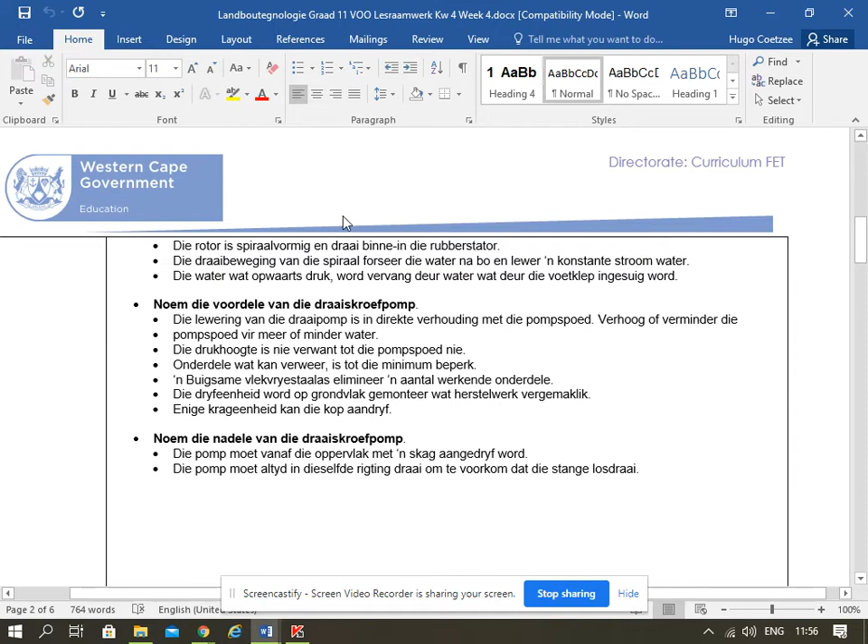Now we said this yesterday, this is our screw pump. It's also a lot more expensive. It's baie duurder. It's going to cost you more money to do this with a screw pump. But it is the better one because you can control, like we learned yesterday at Delheim, how much water do we need? We can't flood irrigate because it will flow away.

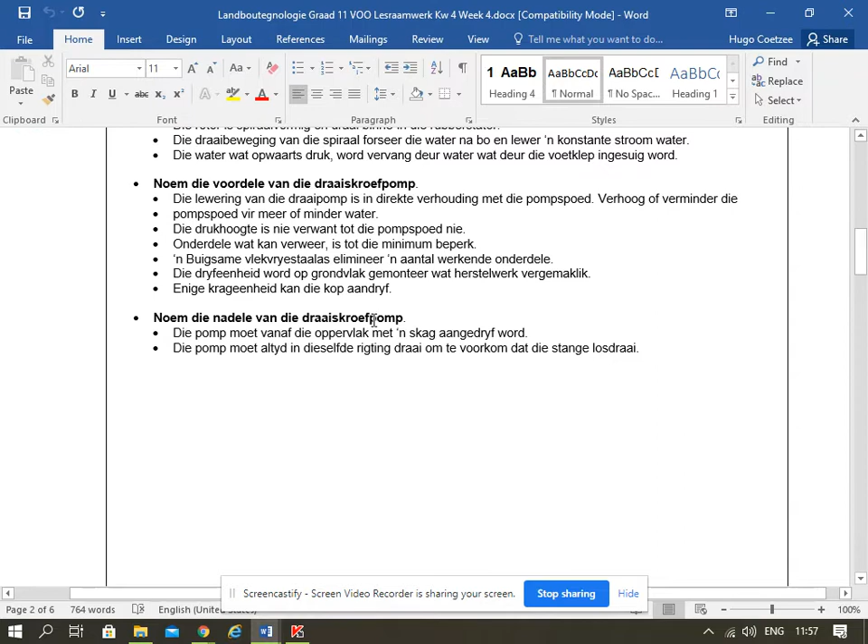Quality over quantity. Because in places like the Orange River, where they flood irrigate, they have huge amounts. The quantity is huge, as baie. But the quality is shit. That's papsak wyn. Hy sien verskil tussen wyn in 'n box en wyn in 'n sak. You understand? Wine in a bottle and wine across the road there in the oliekannetjie.

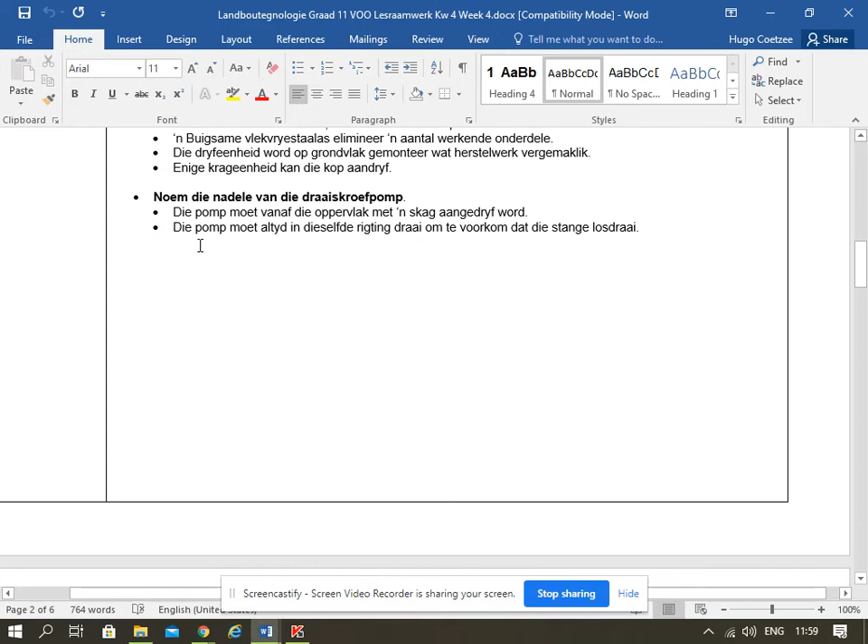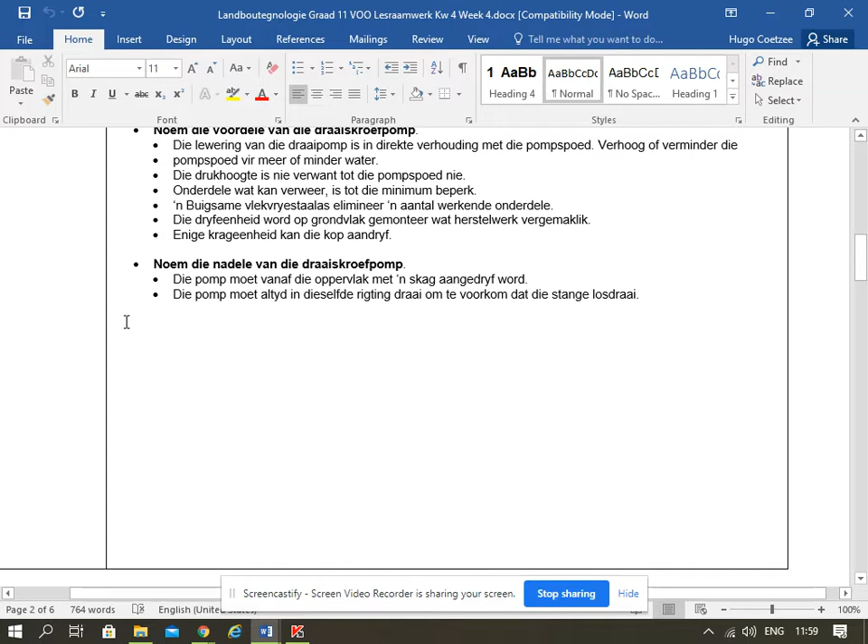And the next one, die nadele, all the negative sides. Die pomp moet vanaf die oppervlak met 'n skag aangedryf word, so there must be a shaft to run this pump. Die pomp moet altyd in dieselfde rigting draai om te voorkom dat die stange losdraai. You can't let the pump go clockwise then to anti-clockwise. Then it's going to rip out the whole shaft.

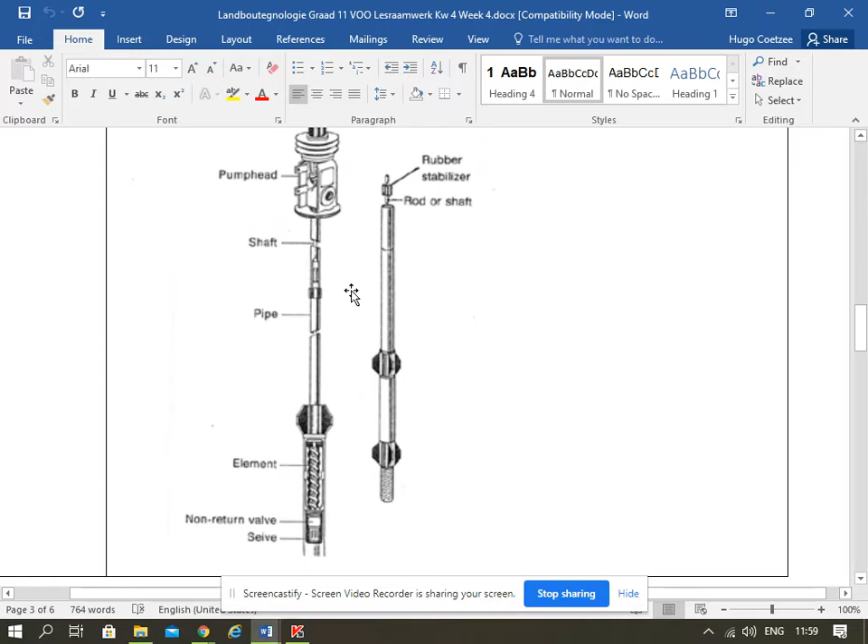And now we come to the national sport of Jan Kriel, centrifugal pump stealing. Die sentrifugale pomp.

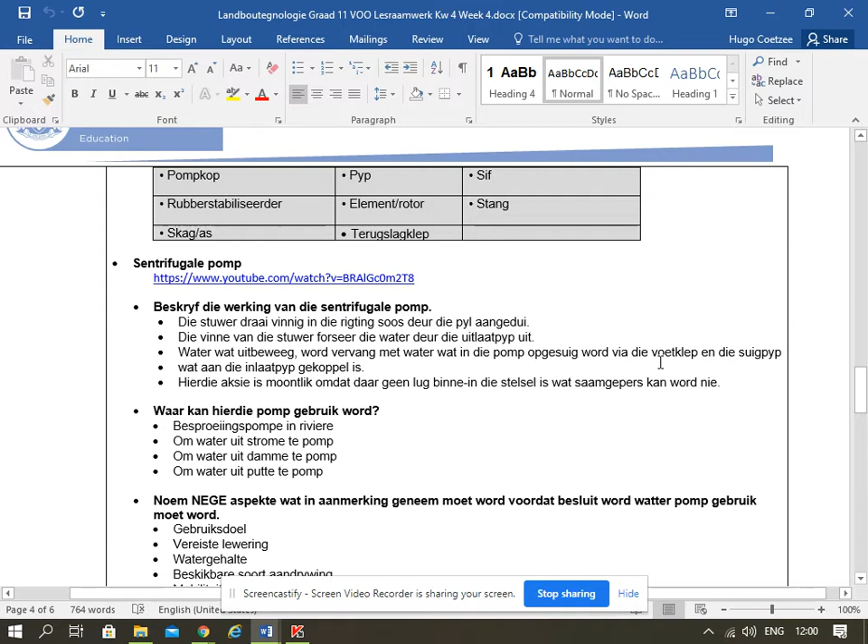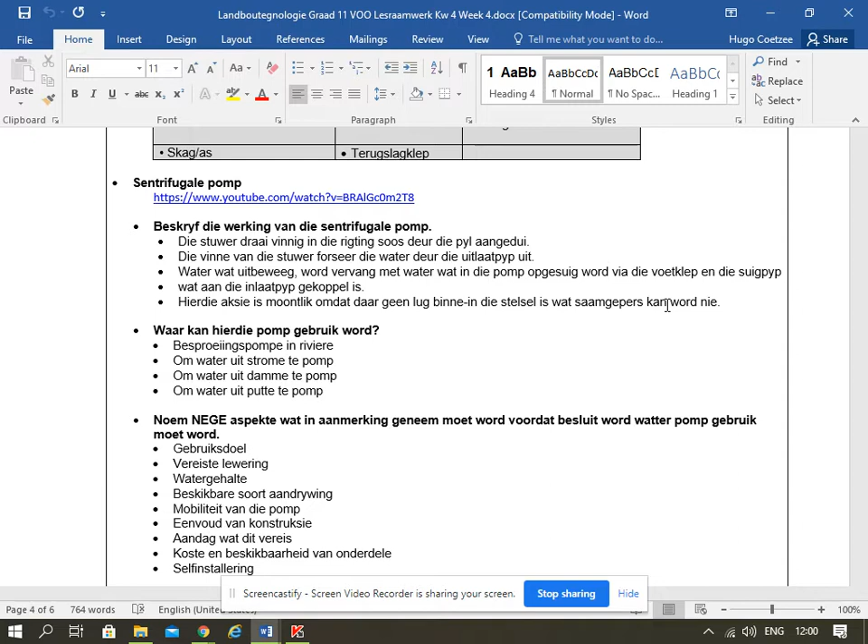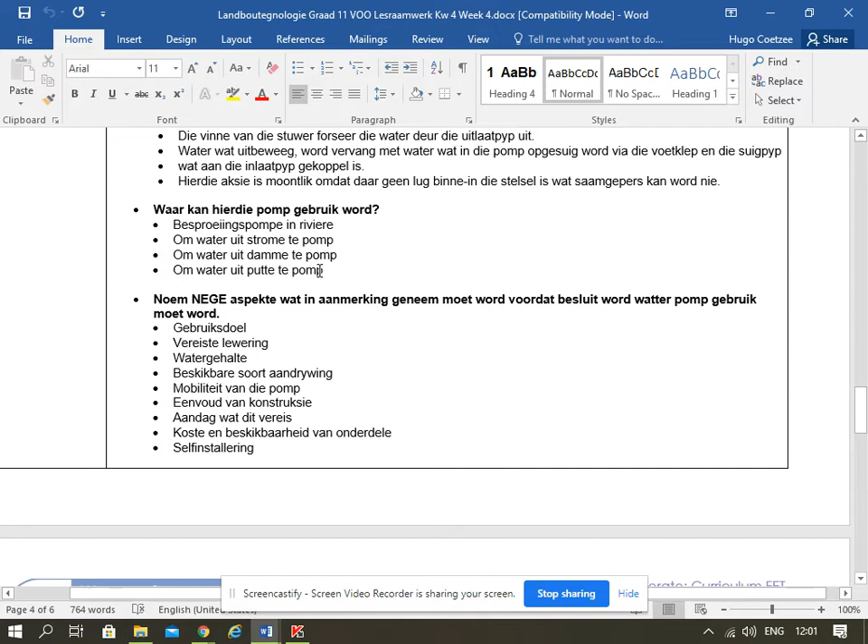Where do we use this? For river irrigation, vir water uit strome, water uit damme en water uit putte. So we use this to get water out of dams, out of streams, out of rivers and out of pits. Kan jy hom gebruik uit tenke uit? Yes.

Hey? Multi-purpose. Pools as well. Centrifugal pump kan vir 'n swembad gebruik. If it goes very, very bad in Cape Town, 'n lekker glasie pool water, my vriend.

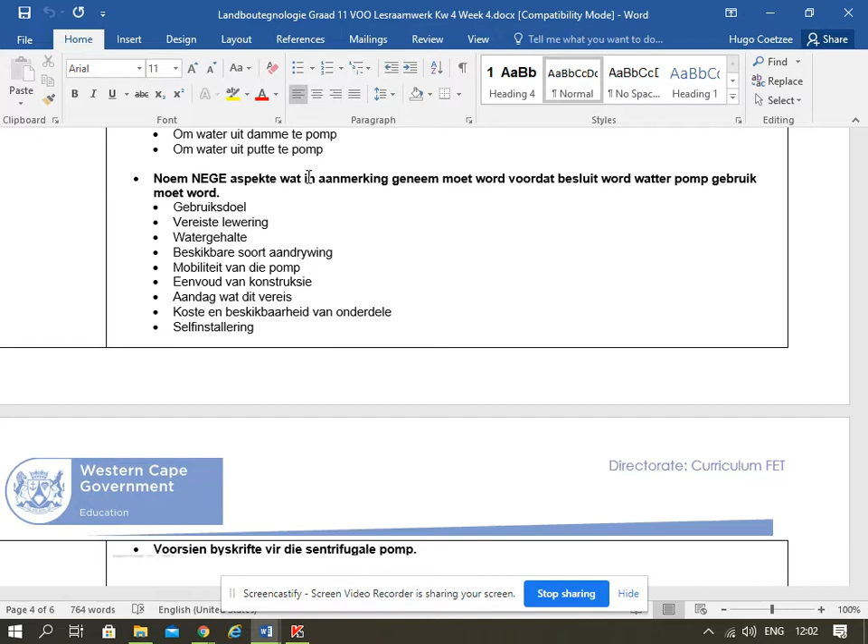Beskikbare soort aandrywing. How can I run my pump: with electricity, with a generator, with a bicycle? Jy moet eers uitfigure hoe gaan ek my pomp hardloop. Mobiliteit van die pomp. How mobile must the pump be? Moet ek hom kan uithaal en skuif of moet hy op 'n punt staan? Must it stay in its place or must I be able to move it? South Africa, try to move it.

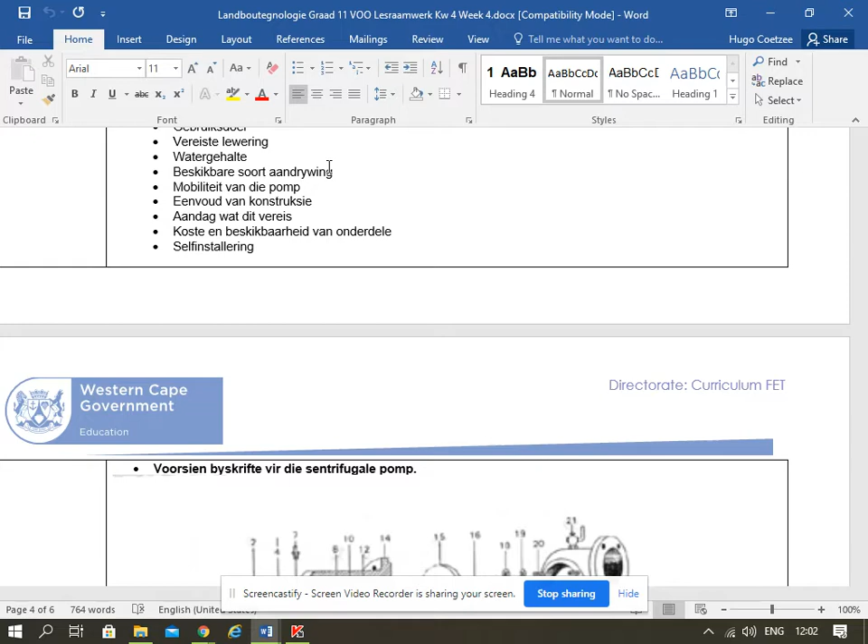Eenvoud van die konstruksie. How easy is it to build this and how is it constructed? But remember, you work with farm workers that are not really fully educated. If it's something easy, then you install it. As dit maklik is, installeer dit. Maklik regmaak. Aandag wat dit vereis. How much time and maintenance am I going to spend on this pump? Hoe lank gaan ek werk aan die pomp? Koste en beskikbaarheid van onderdele. Are the parts available in my area where I live?

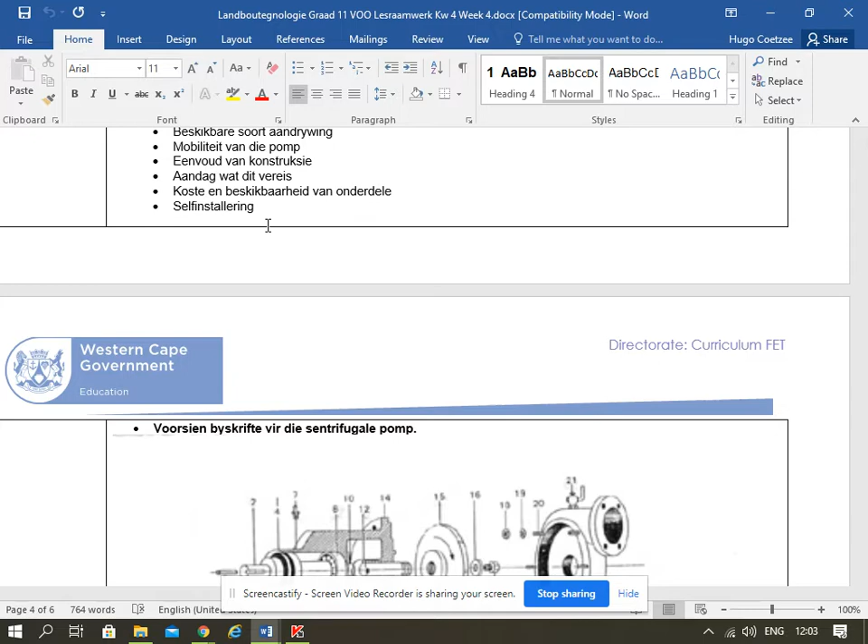Self-installering: can I put it in myself or should I get somebody in? Remember, we as farmers want to put it in ourselves. Julle het mos gesien, die John Deere saak wat aangaan. Die farmers baklei om hulle eie goed reg te maak. Ja, maar dan weet ons hoe dit werk. Pragtig. Want dis elektroniese rubbish wat krap op die goed.

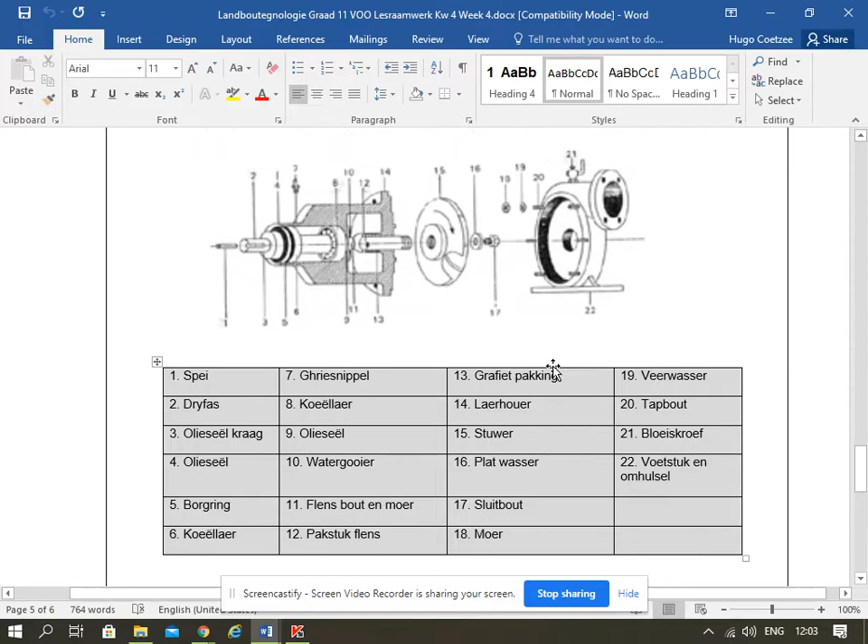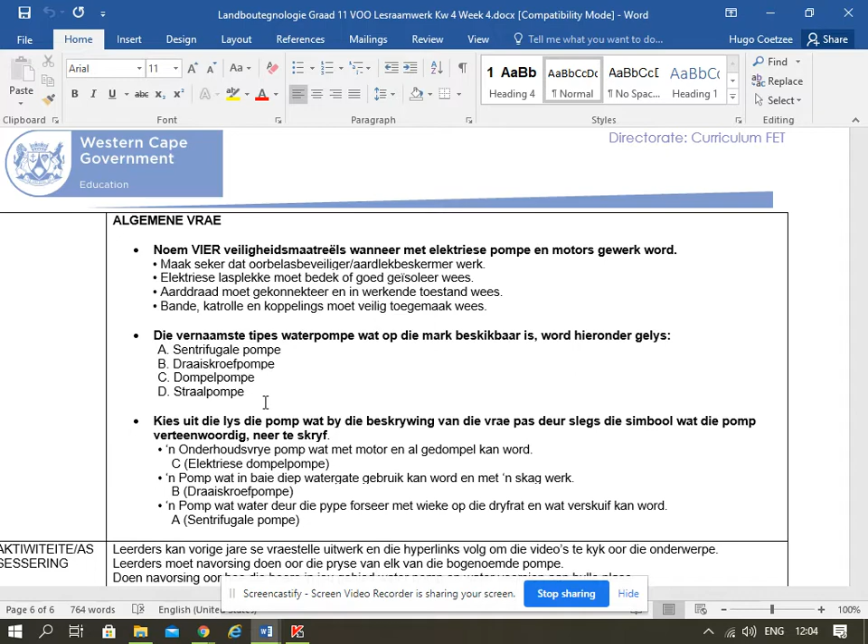There's the pump sketch with all our parts. Grease nipple. Right, and then standard general questions. Hierdie algemene vrae, you'll also have this in your book, are general questions that we can ask in the exam. Okay. Noem 4 veiligheidsmaatreëls wanneer ons met 'n pomp werk. Maak seker dat die oorbelasbeveiliger en aardlekbeskermer werk. Elektriese lasplekke. I'm not going to go through the whole thing, but there are questions that I can ask you in the exam at the end of the year. So now, to make it a bit more fun, because we've got all of these little sketches there.

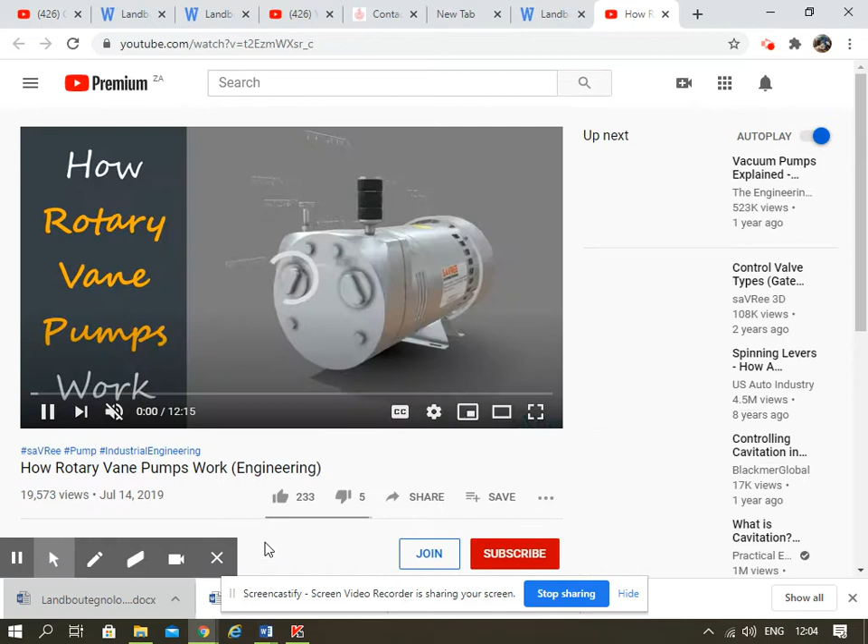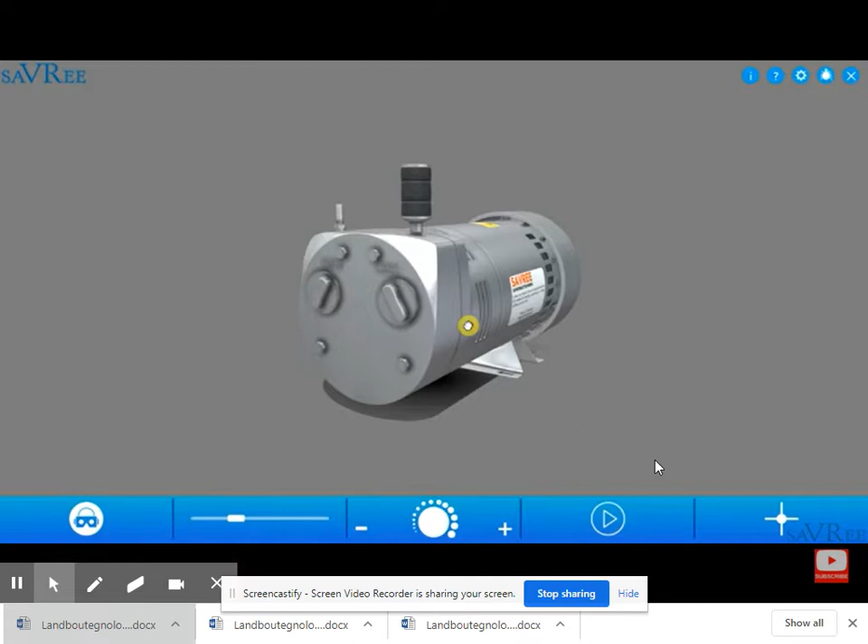All of its main components, how it works, some of its design features, and the advantages and disadvantages associated with this type of pump. So here is a rotary vane pump. This particular pump is quite small. It looks like it would connect to a 220 volt supply. It's used for aeration, so it's going to be pumping air, but we can also use vane pumps in hydraulic systems and also for creating a vacuum within a system. Let's load up the labels. We can have a look at some of the components.

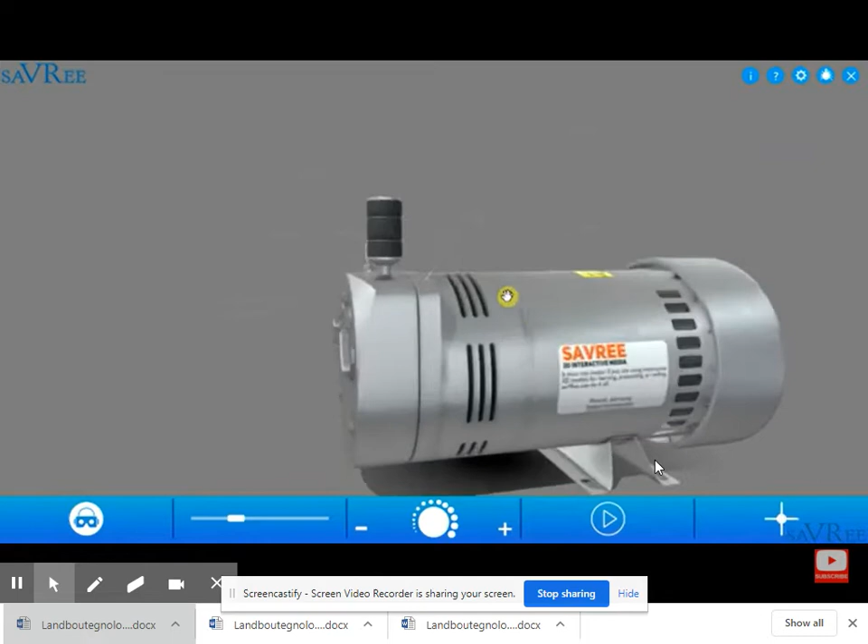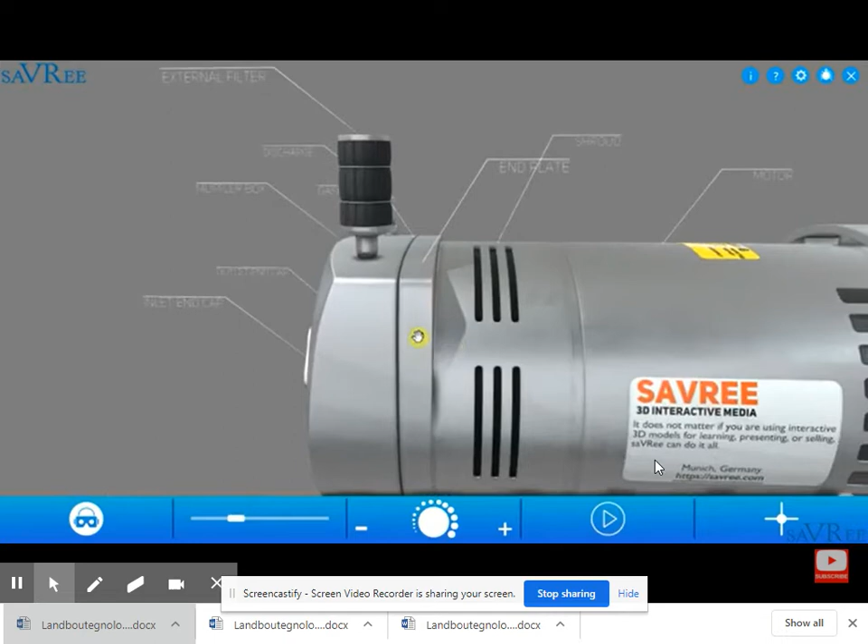So we have our motor. That is this section here. We have our shroud. We have an end plate, this item here. We've got an inlet and an outlet end cap. This is the inlet cap and the outlet in the background.

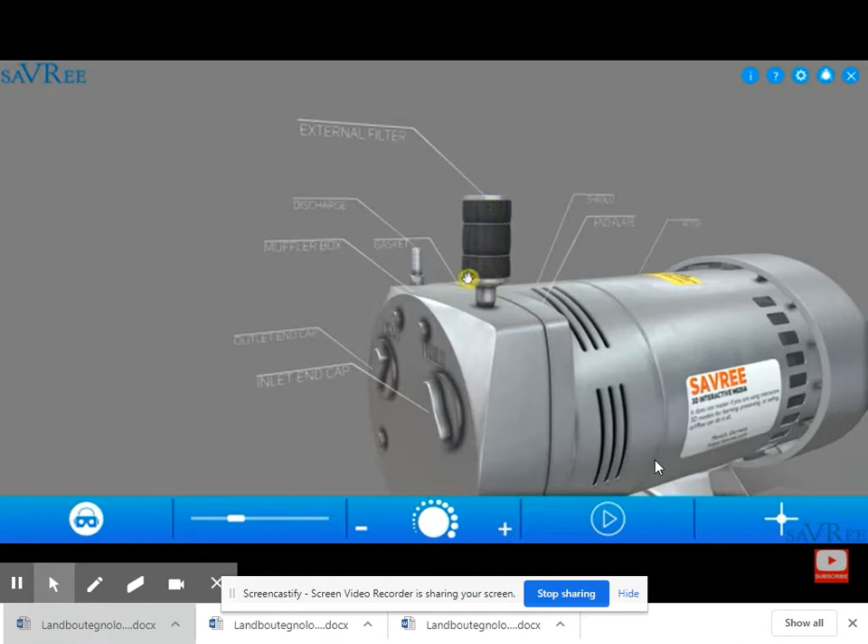We've got a muffler box. That is this whole piece around here. We've got an external filter which we use to draw air into the pump. And over the back, we've actually got the main discharge, and that would be through this pipe here. The gasket is a static type seal which has been installed between the muffler box and the end plate.

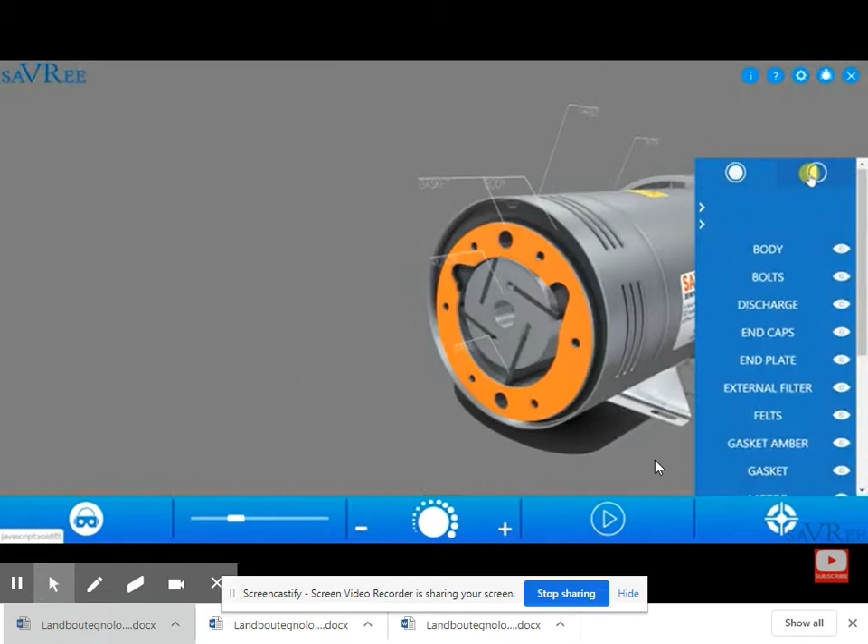If we take a cross section, then we can have a look at some of the internal components as well. So we can see some of the internal components. I'm just going to get rid of the amber gasket. We've got a rotor. That is this round item here.

We've got the vanes. There's 4 of them.

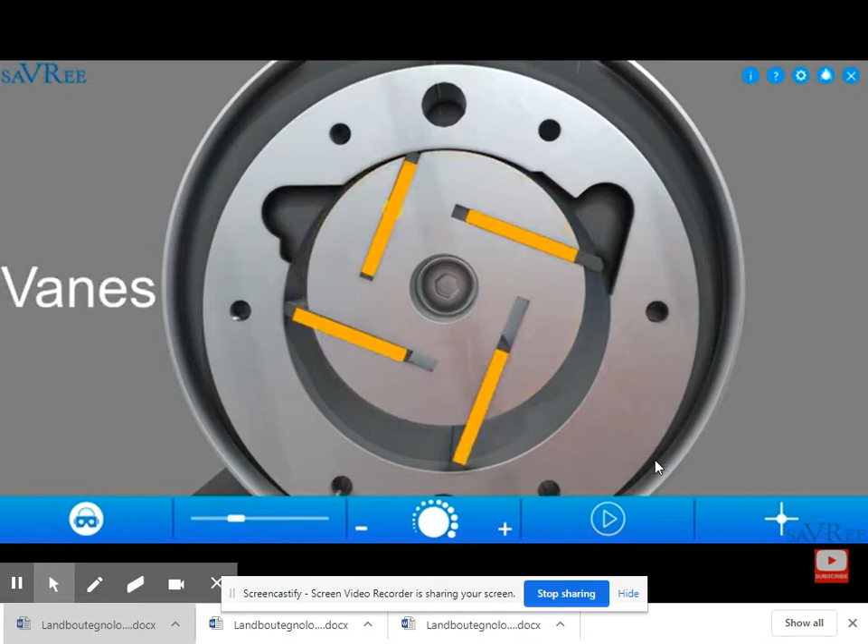One here, another one here, and one there. And then we have a cam ring, which some people also call a stator. And that is this entire piece around the outside here. The stator in this pump is stationary, whilst the rotor rotates.

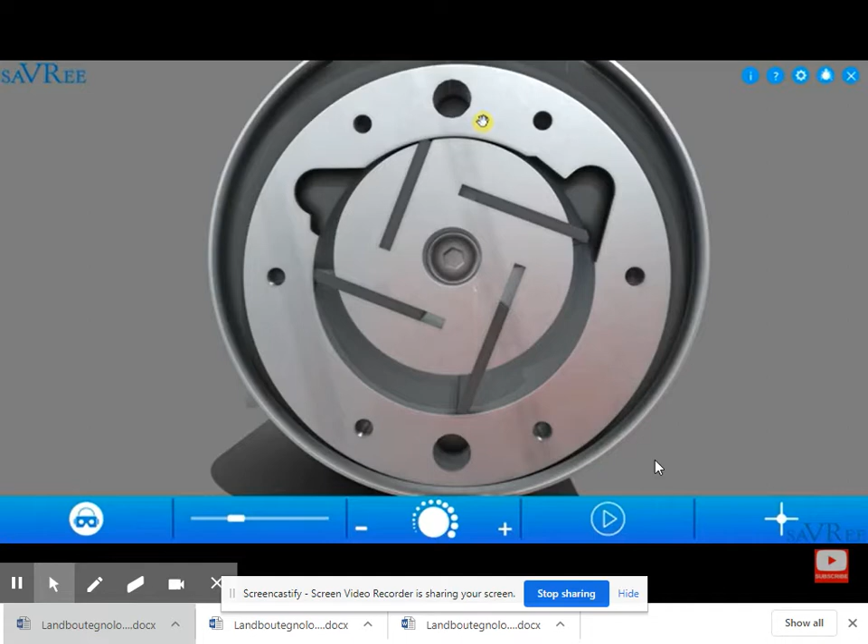Now we've learned the names of some of the components, let's see if we can figure out how it works. You can see we've got our external filter. That's where we're going to draw air into the pump. Because this type of pump is very sensitive to foreign particles and abrasion, we're actually going to have an additional filter inside the muffler box.

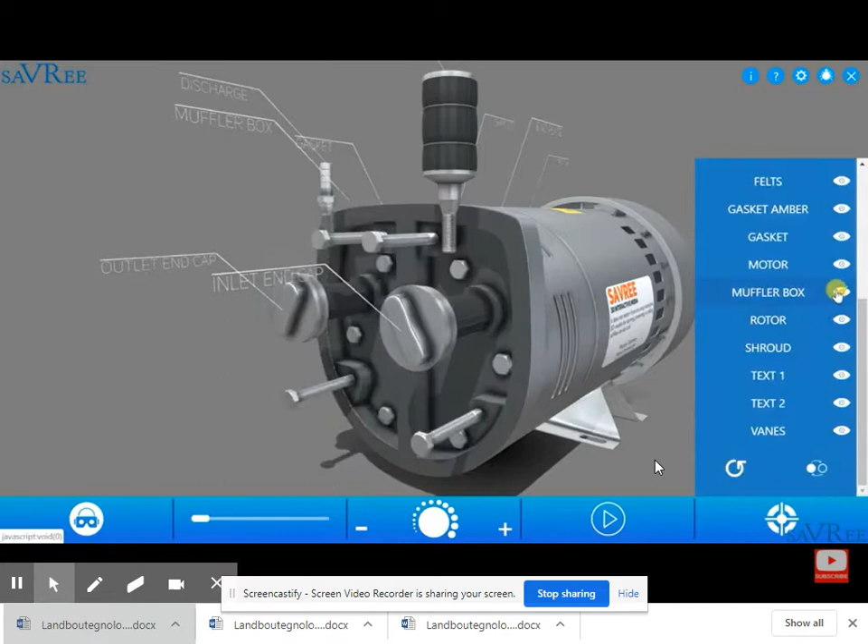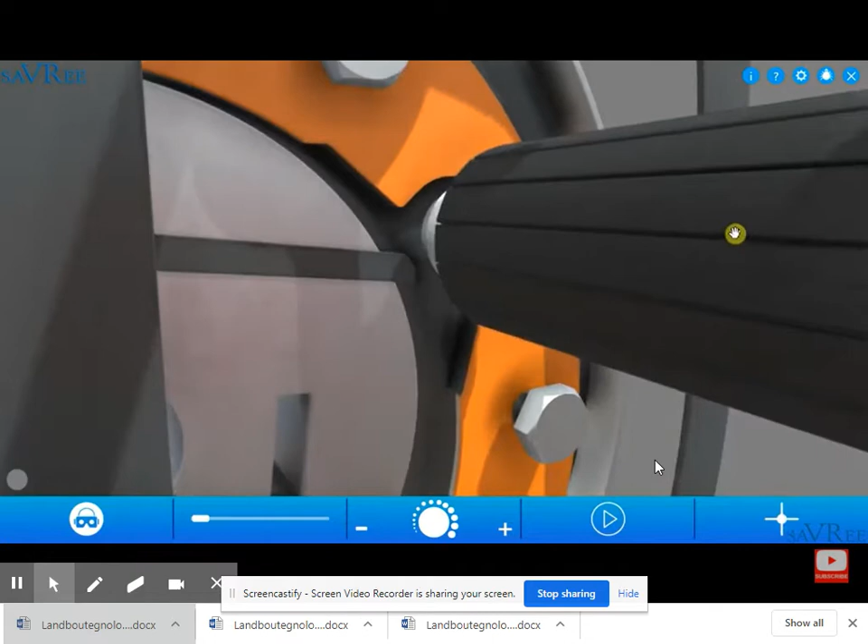We can see the air flows in through the filter here, is discharged through the base of the filter, and then passes through a secondary filter here in order to reach the suction port of the pump. We take away the end plate, we should be able to see the suction port underneath. So the air has passed through the external filter, now the internal filter, and it will be discharged in this space here, which is the suction port of the pump.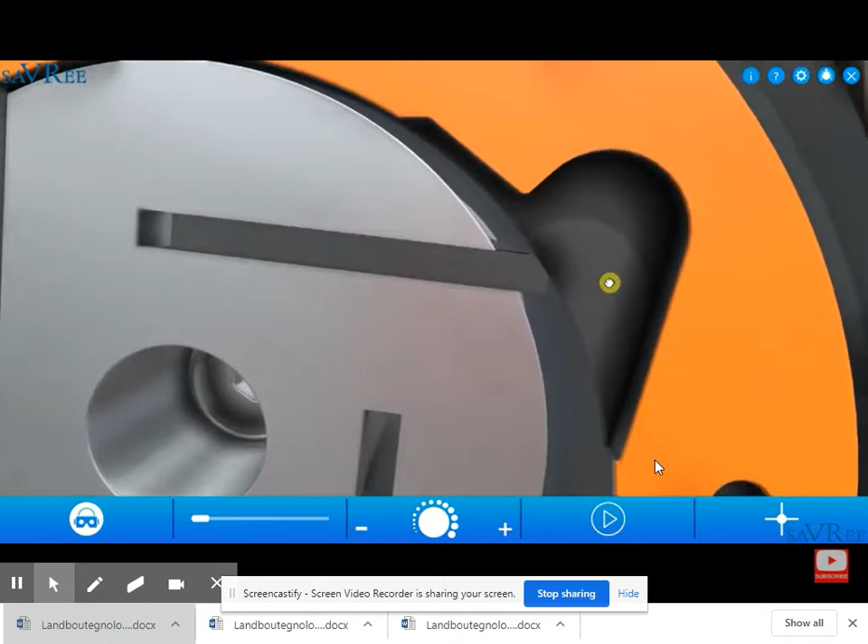If we take a cross section, we'll be able to get a much better view of what's happening inside the pump. And I think this time we can actually take away some of the labels, which we no longer need. When the air or fluid, in our example we're using air, but it can be another fluid. These pumps are often used for hydraulic fluids as well. If we back it up, we can watch what happens as the fluid flows in.

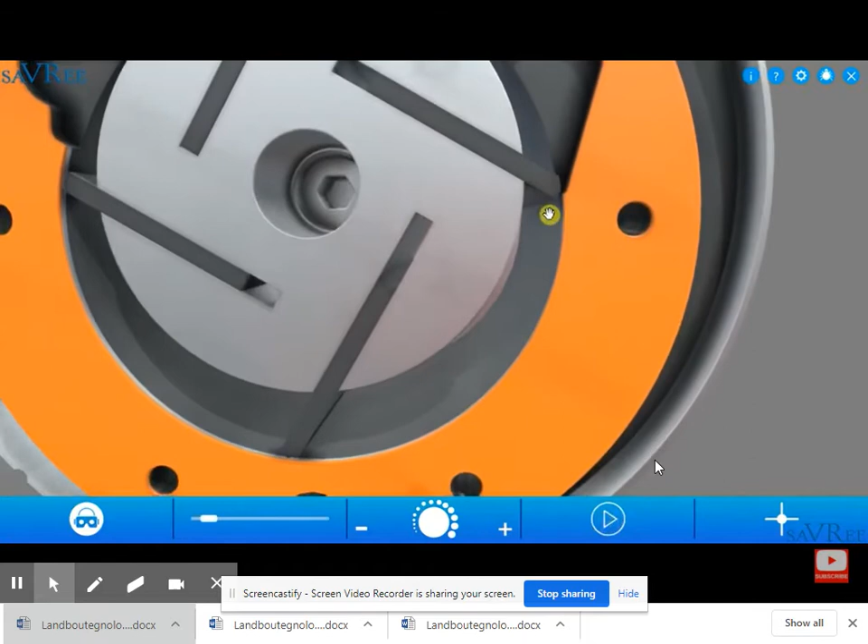The air comes in here, and it's going to fill up the entire space between one vane and the other vane. As the rotor rotates, we're going to seal off the space between the two vanes, and then as the rotor continues to rotate, the vanes are going to turn, and we're going to open up the discharge port.

Notice now that the discharge port is open, and we're going to displace or force out all of that fluid, all of that air into the discharge port. The reason this occurs is because gradually the volumetric space in this area is decreasing, whereas on the opposite side, on the suction side, the volumetric space was increasing.

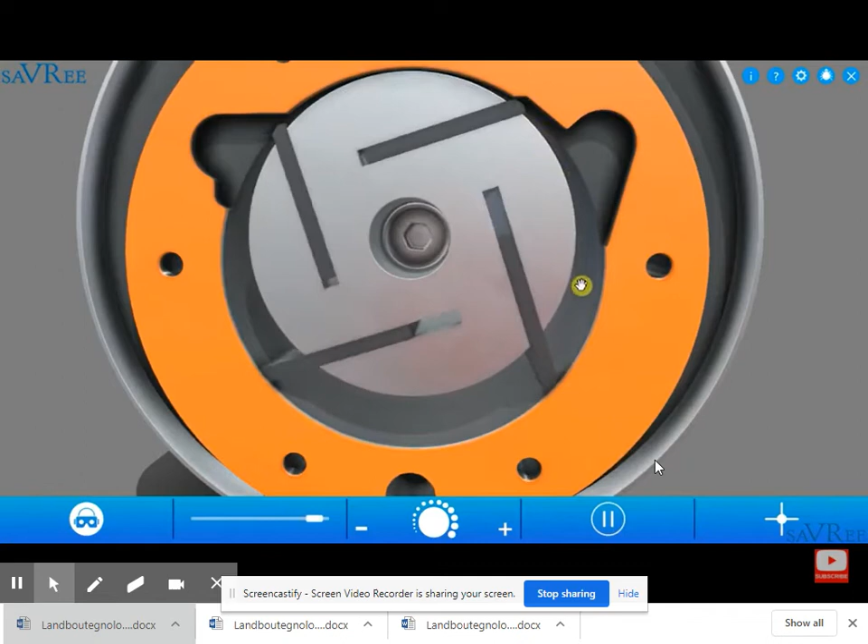Let's just play that through. We're discharging the air. It's completely discharged. We'll go around here, and then we're going to be sucking air back in on this side, completely fill this chamber, force the air around. This may also be a fluid, remember, maybe a hydraulic fluid, etc. And then begin to discharge the fluid on the opposite side. And in this manner, we can create flow. And that's exactly what pumps do.

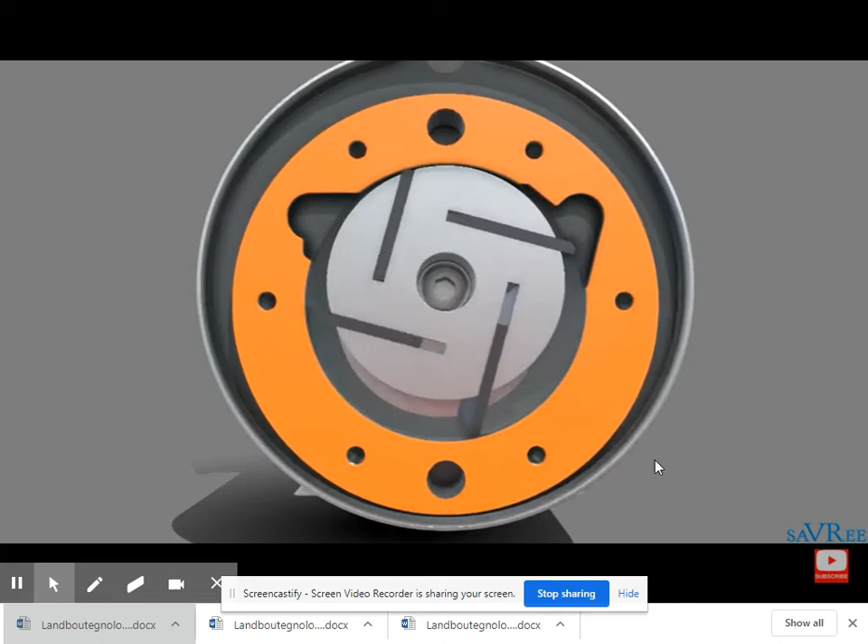This particular type of pump is a positive displacement pump. That means it can pump air, whereas a centrifugal pump, for example, cannot. Notice that the vanes on our particular pump are simply sliding in and out of the rotor due to centrifugal force. It is, however, possible to use hydraulic pressure to force the vanes outwards against the cam ring, or to use springs. Notice that the rotor is offset compared to the position of the cam ring.

It's slightly elevated above the center line of the cam ring. If the rotor is offset, it means that we can draw fluid in here and discharge it on the opposite side, because there's a changing volumetric space from one side to the other. If we were to push the rotor onto the center line of the cam ring, then there would be no flow, because the volumetric space around the entire rotor and the cam ring would remain constant, so there would be no reason to get flow.

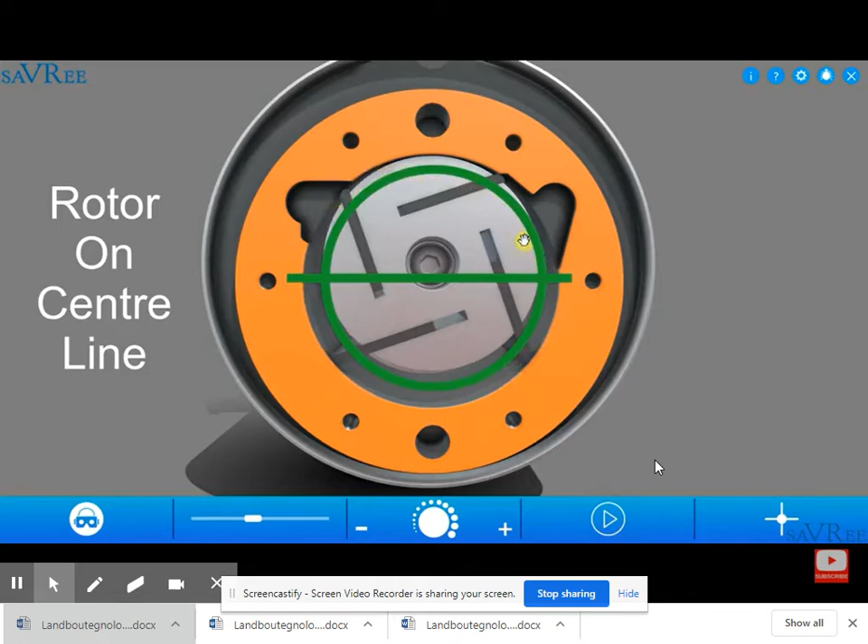Now, this particular type of vane pump is known as an unbalanced fixed displacement pump. It's unbalanced because the rotor is offset.

That means that there are additional loads transferred to the pump shaft. For this reason, the pump's known as unbalanced. It's also possible to have a balanced vane pump, where the rotor sits in the middle of two eccentric cam rings. There'll be two inlets and two discharges. For example, an inlet here, and then a discharge, and then a discharge, and an inlet.

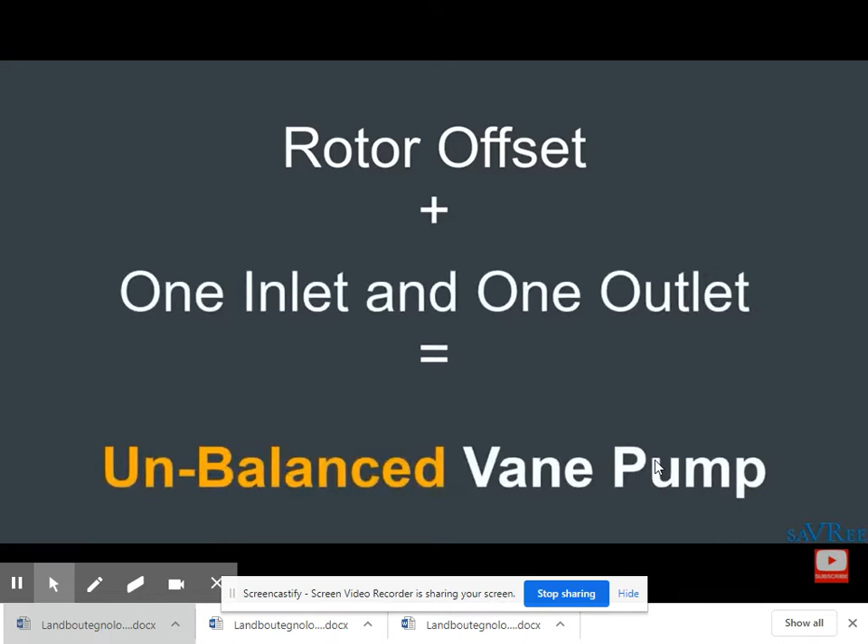Because the rotor sits in the middle of two eccentric cam rings, and because there are two inlets and two outlets, we have a balanced rotary vane pump. So just remember that if the rotor sits offset to the cam ring, and there is one inlet and one outlet, then it's an unbalanced pump. If the rotor sits in the middle of two eccentric cam rings, and there are two inlets and two outlets, then it's a balanced rotary vane pump.

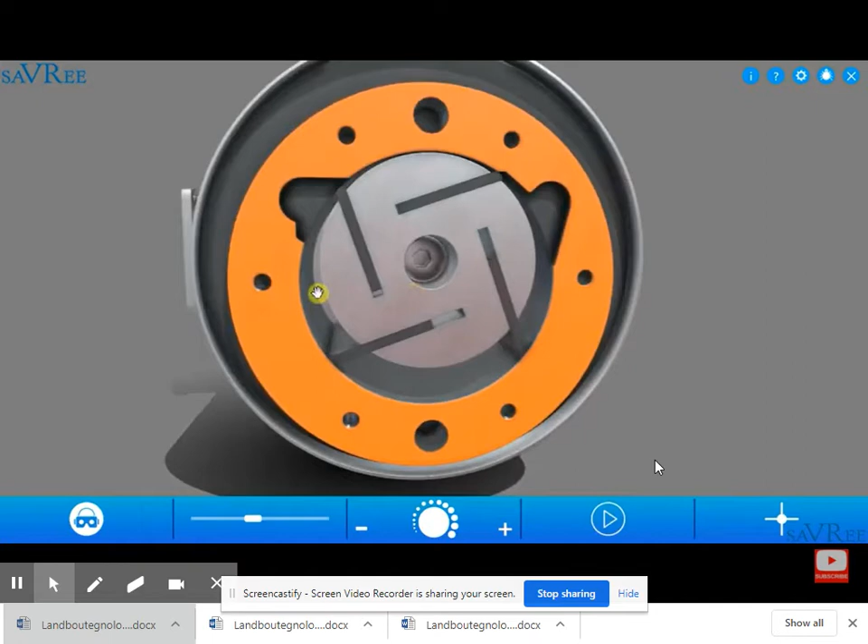We can see on our pump that the cam ring does not move in relation to the rotor. That means that if the speed of the pump remains constant, so does the flow rate. This is a fixed delivery pump. We're always going to be displacing the same amount of fluid for every rotation that we make.

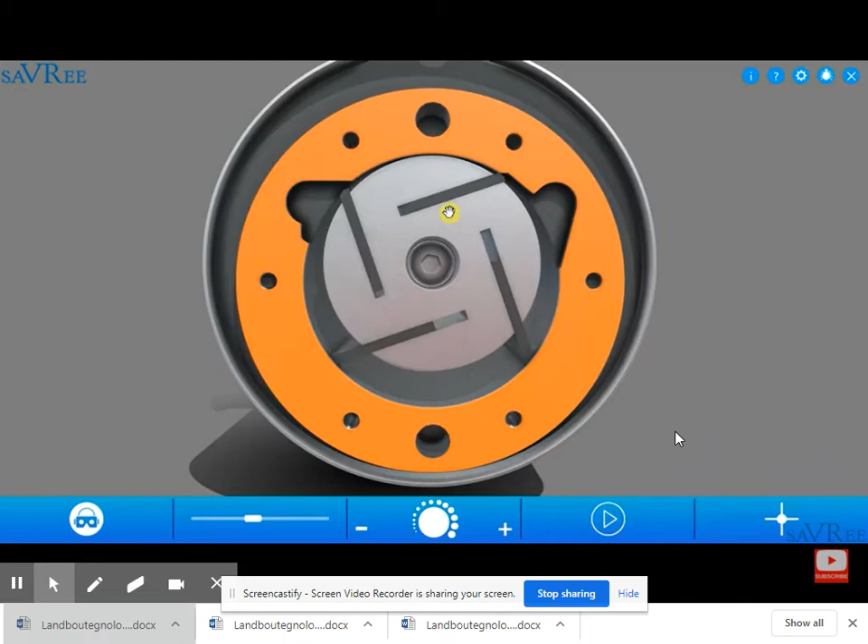There is, however, a slightly different design that you may see, and this design is called variable displacement or variable delivery. We can vary the delivery rate of the pump by varying the position of the cam ring with respect to the rotor. If we were to move the cam ring upwards, then we would decrease the delivery rate of the pump. Remember that if the rotor sits directly in the middle of the cam ring, we get no flow.

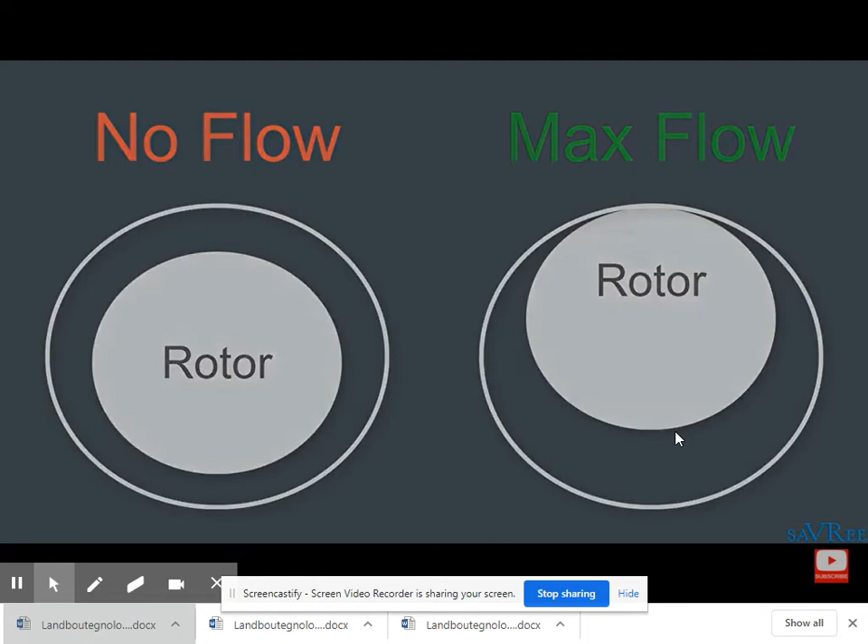And by pushing the cam ring upwards, we're going to position the rotor more in the center of the cam ring. That means that as the cam ring is moved upwards, the flow rate will gradually decrease until the rotor is perfectly in the middle of the cam ring, and then there will be no flow whatsoever. But how do we force the cam ring upwards?

Well, we can do that by connecting a hydraulic piston onto the discharge side of the pump. The connection will come around and we'll have a piston on the lower side, and if the discharge pressure increases too much, then the piston will push the cam ring upwards, the rotor will move more into the center of the cam ring, and the flow rate will decrease.

When the discharge pressure reduces again, the piston will move downwards, and the cam ring will move back to its original position, because on the opposite side, on this side here, there will be a spring. So it's the hydraulic piston, which is controlled by the discharge pressure of the pump, which forces the cam ring upwards, which puts the rotor more into the center of the cam ring, which in turn reduces the flow rate through the pump.

As the pressure on the discharge side decreases, the spring pressure on the top of the cam ring will push the cam ring downwards because it can overcome the hydraulic pressure in the piston. And in this way, we can vary the delivery rate of the pump.

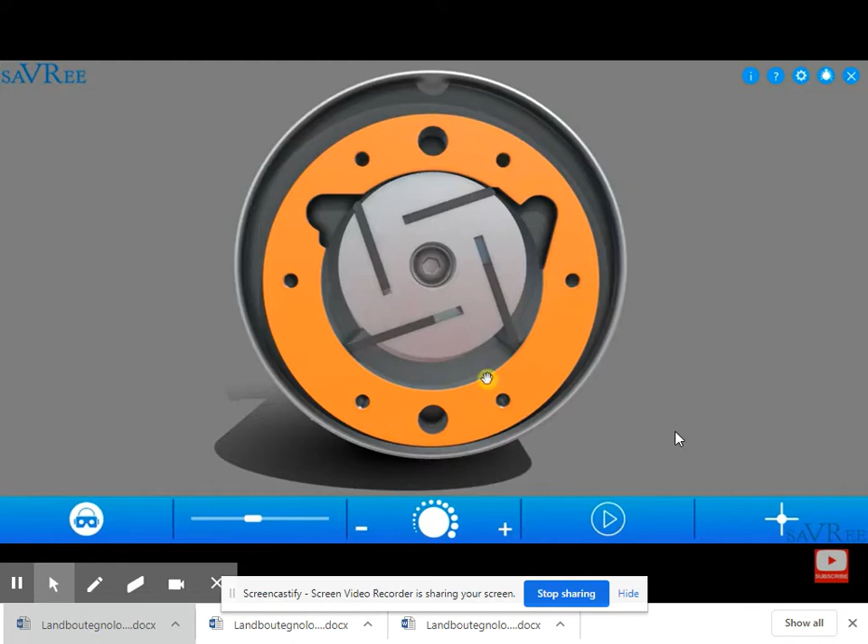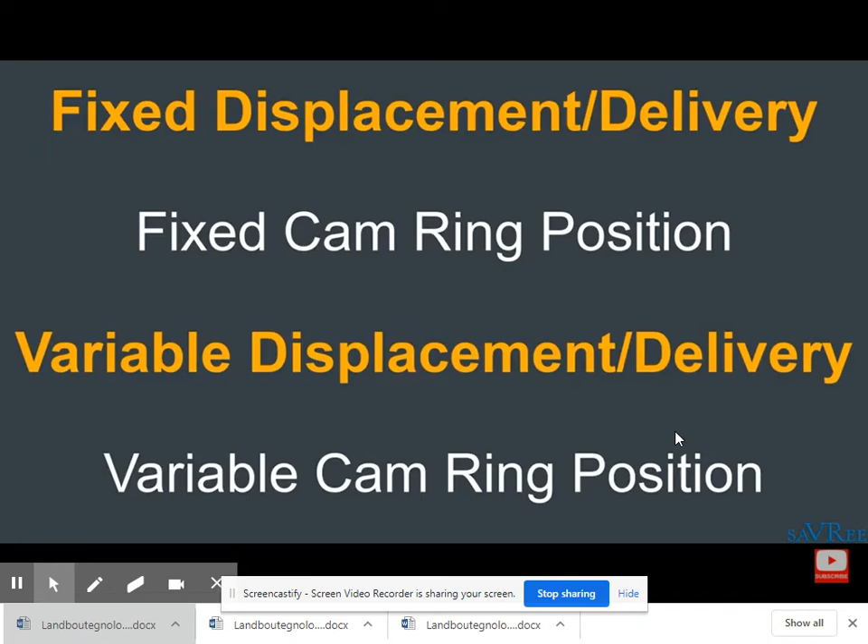So two different designs: the fixed delivery rate pump, like the one we see here, where the cam ring is stationary in relation to the rotor, and the variable delivery design, where we use a hydraulic piston to adjust the position of the cam ring in relation to the rotor, and then we'll use a spring to return the cam ring to its original position once the hydraulic pressure decreases.

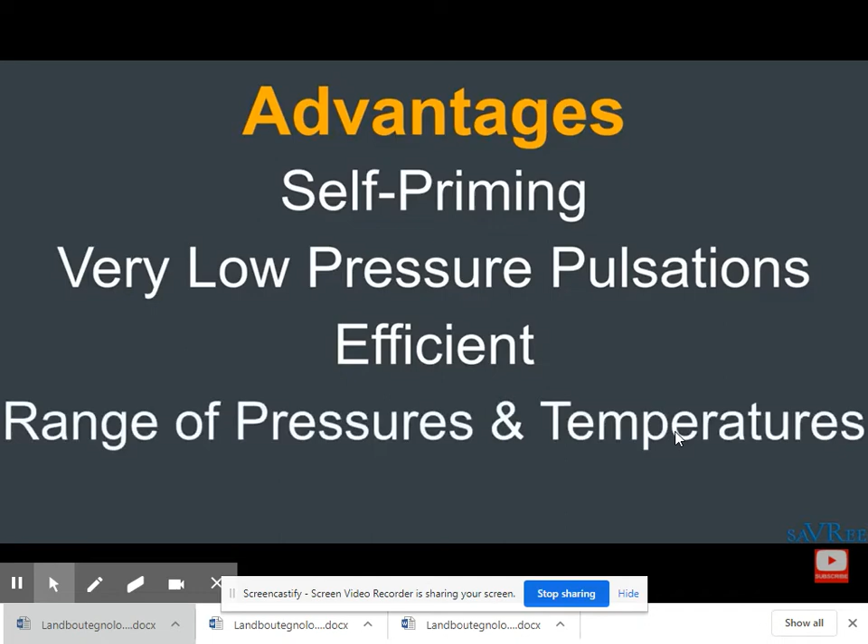As with all pumps, there are advantages and disadvantages, and the rotary vane pump is no exception. The rotary vane pump is a type of positive displacement pump. They're self-priming, have very low pressure pulsations, and are efficient. They're also suitable for a wide range of pressures and temperatures. In addition to that, rotary vane pumps are also quiet compared to other types of pump.

There are, however, some disadvantages. The pump itself has quite a complex design compared to other pumps, and because of the tight seals between the vanes and the cam ring, the pump is very sensitive to foreign particle ingress. For this reason, additional filters are required on the suction side to remove any fine particles that may damage the internals of the pump. This type of pump is also not suitable for pumping abrasive liquids.

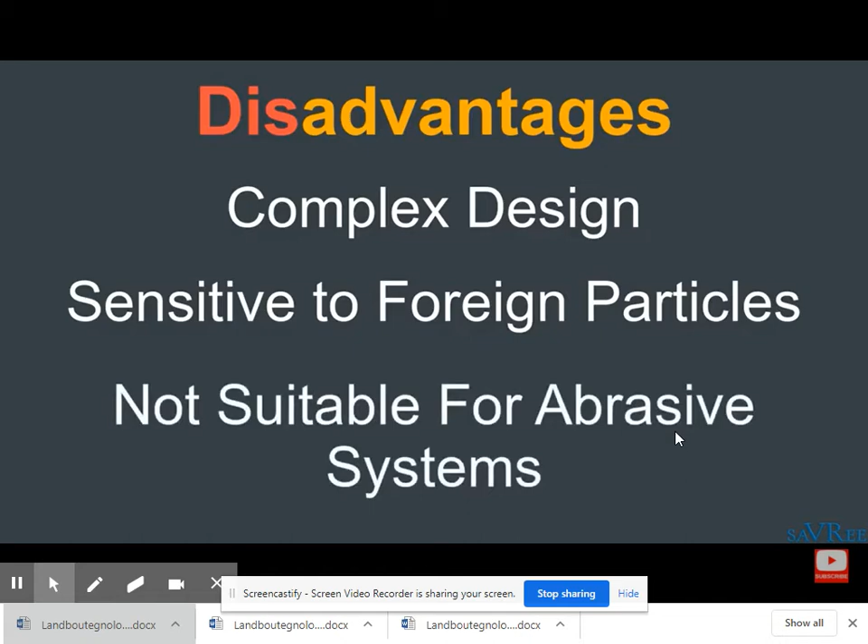So you now know all of the main components associated with a rotary vane pump. You know how it works. You know some of the main designs, such as unbalanced and balanced, and fixed delivery rate and variable delivery rate. And you also know some of the advantages and disadvantages associated with this type of pump.

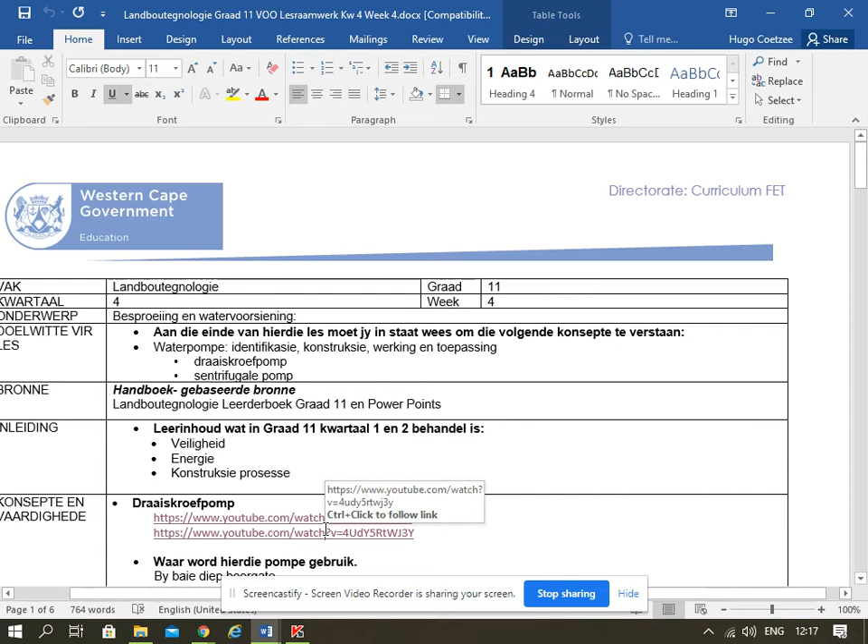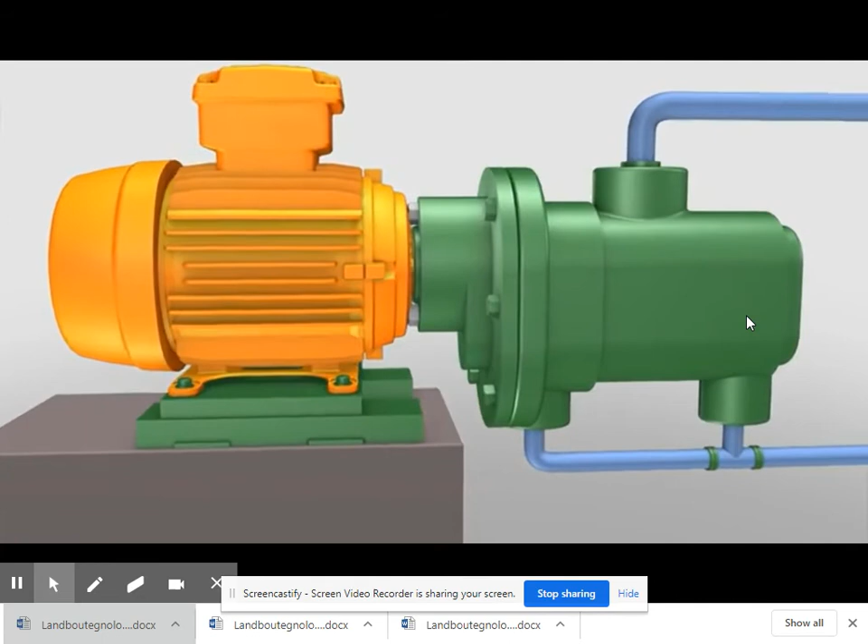There are 4 types of rotary pumps: screw pump, gear pump, lobe pump, vane pump. In screw pumps, it is the intermeshing of the threads on the rotors and the close fit of the surrounding housing that creates one or more sets of moving seals in a series between the pump inlet and outlet.

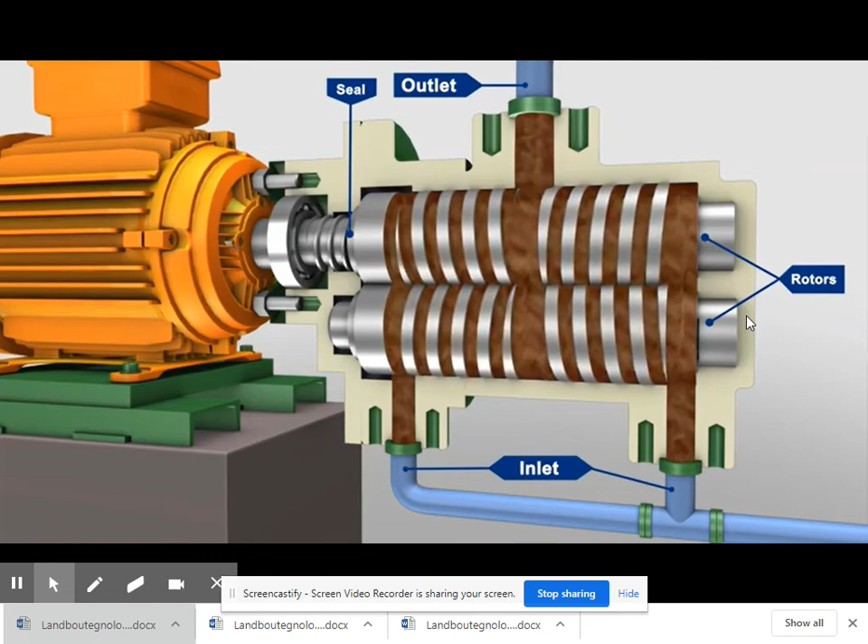These sets of seals or locks, as they are sometimes referred to, act as a labyrinth and provide the screw pump with its positive pressure capability. The successive sets of seals form fully enclosed cavities that move continuously from inlet to outlet. These cavities trap liquid at the inlet and carry it along to the outlet, providing a smooth flow.

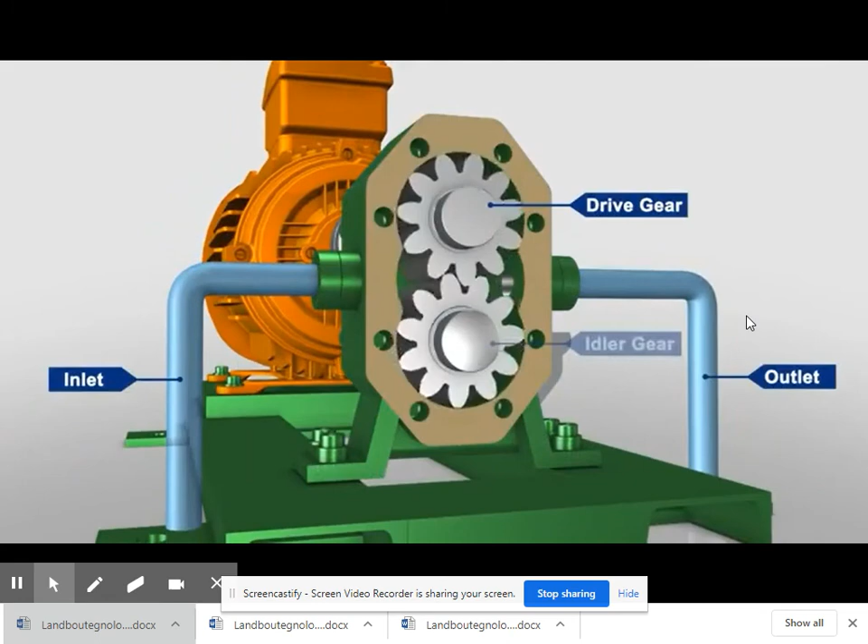The pump is so named because it has 2 gears that are side by side or external to each other. A drive gear that is driven by a motor rotates an idler gear in the opposite direction. When the gears rotate, the liquid which is trapped...

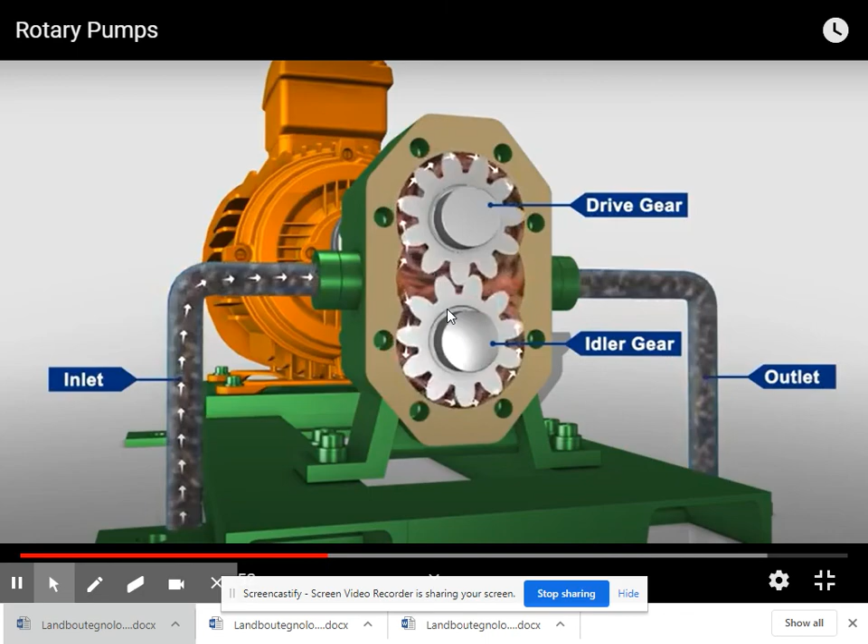Trapped in the gear teeth spaces between the housing bore and the outside of the gears is transferred from the inlet side of the pump to the outlet side of the pump. The meshing of the gears on the discharge side of the pump forces the liquid out of the pump and into the discharge piping.

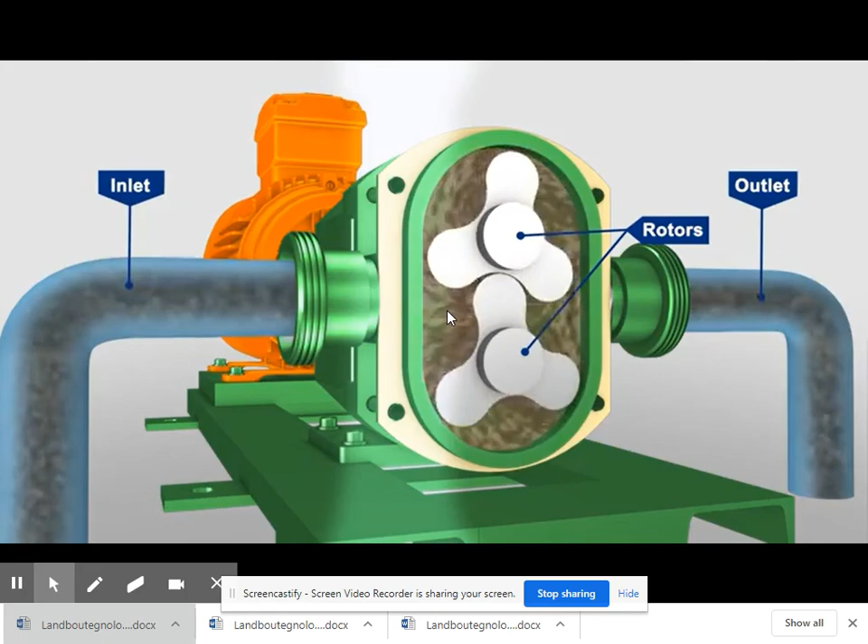The lobe pump receives its name from the rounded shape of the rotor radial surfaces that permits the rotors to be continuously in contact with each other as they rotate. Lobe pumps can be either single or multiple lobe pumps and carry fluid between their rotor lobes much in the same way as a gear pump does. Unlike gear pumps, however, neither the number of lobes nor their shape permits one rotor to drive the other, and so all true lobe pumps require timing gears.

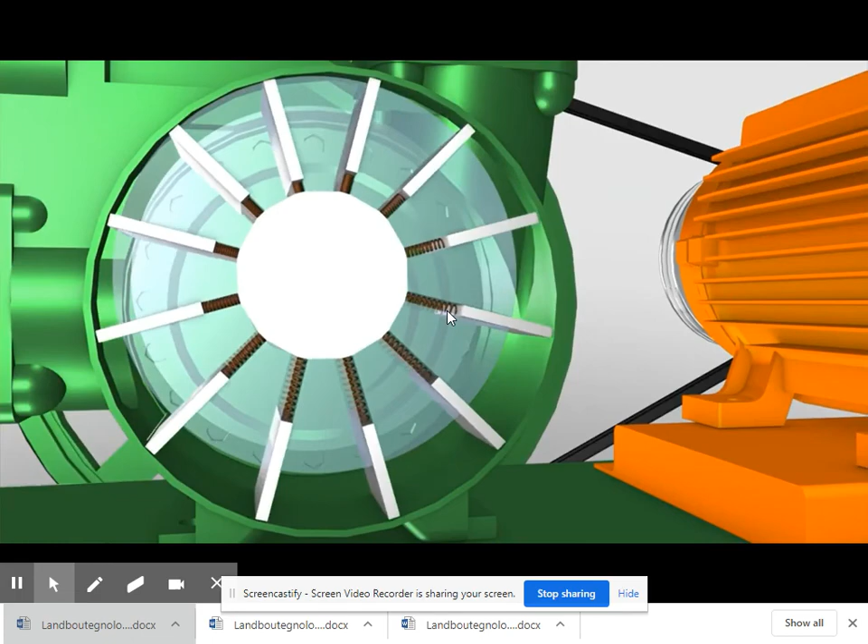Vane pump includes a rotating cylinder containing equally spaced radial pistons arranged radially around the cylinder center line. A spring pushes the pistons against the inner surface of an encircling stationary ring mounted eccentric to the cylinder. The pistons draw in fluid during half a revolution and drive fluid out during the other half. The greater the ring eccentricity is, the longer the piston stroke and more fluid they transfer.

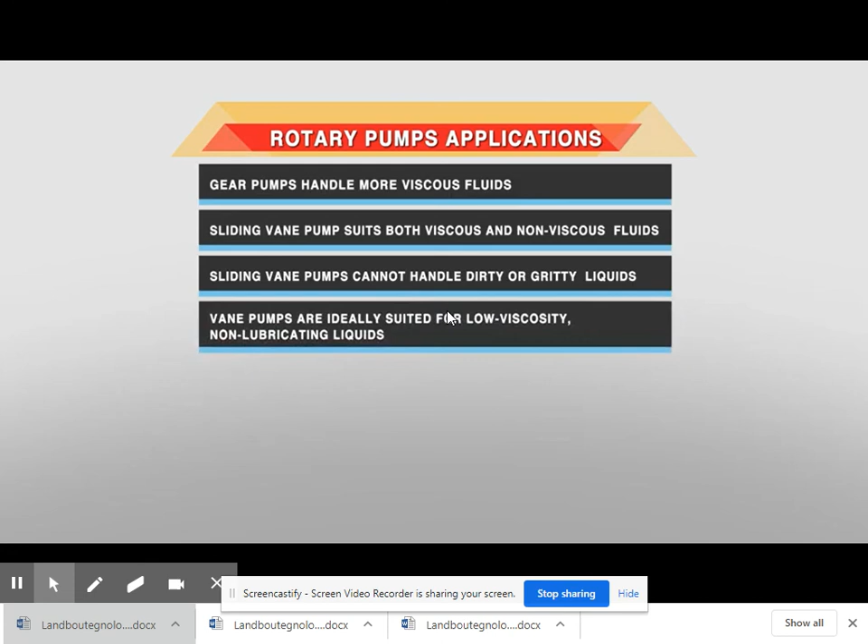Applications of rotary pumps are: gear pumps handle more viscous fluids. The sliding vane pump suits both viscous and non-viscous fluids. Sliding vane pumps cannot handle dirty or gritty liquids. Vane pumps are ideally suited for low viscosity, non-lubricating liquids. Sliding vane pumps are used for vacuum services. Lobe pumps are used for food and beverage processing. Lobe pumps can handle both low and high viscosity fluids.